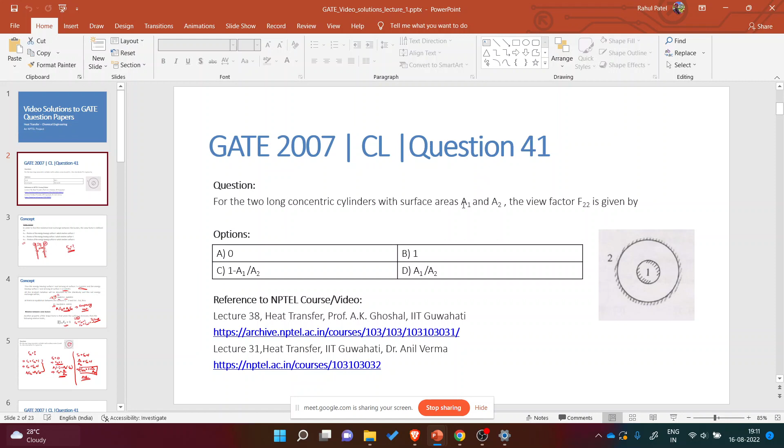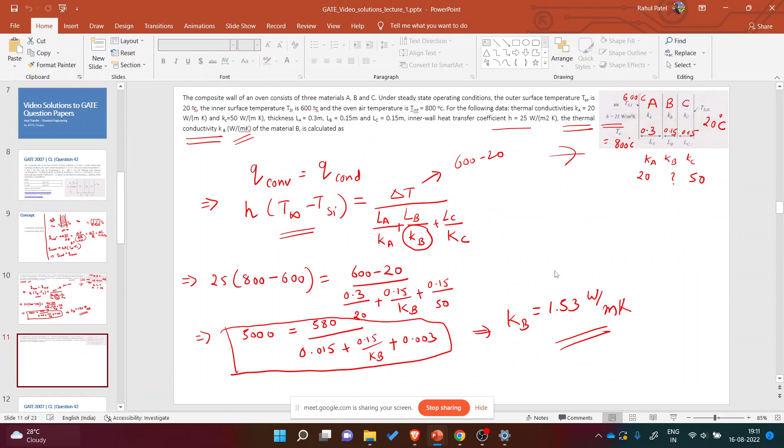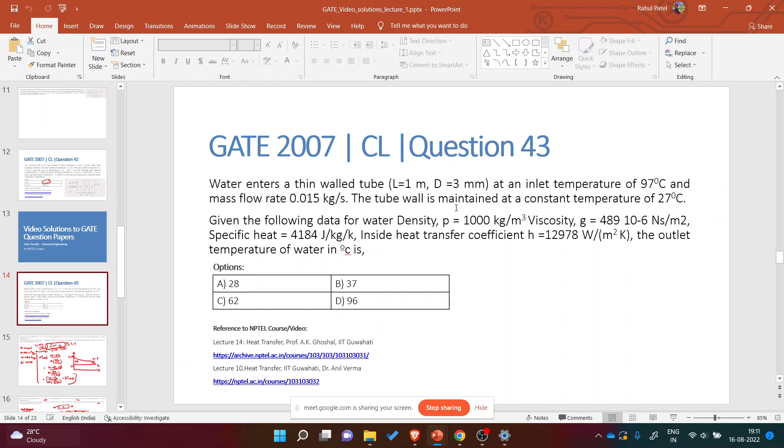So in the past class, we had looked at 4 questions. The first one was related to the radiation view factor. The other one was a heat balance equation across the wall. The third one was related to flow across a thin walled tube, which introduces the concept of log mean temperature difference. Then the last question was a heat balance across a stirred tank vessel. These were from GATE 2007, and today we will be looking at the GATE 2022 paper.

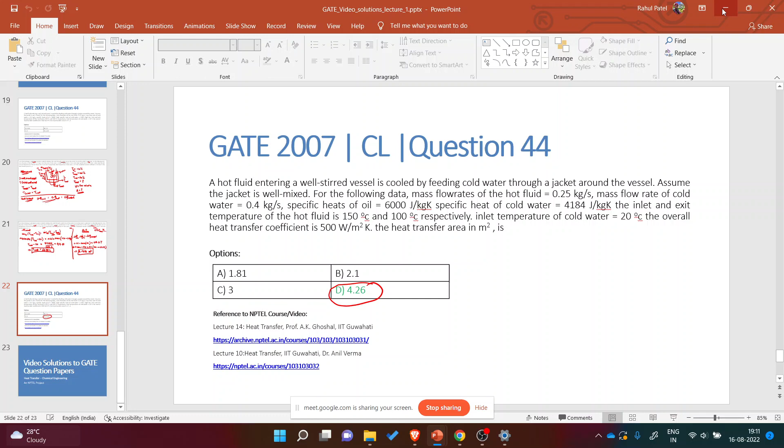Okay, so let's just start. I will read the first question we will be solving today from GATE 2022, chemical engineering paper, subject heat transfer.

We will try to solve all the questions on heat transfer within a couple of weeks, and then move on to other subjects. This is question number 30. You can find all these past year question papers on the GATE portal - not the NPTEL portal, but the specific GATE portal.

The first question we will be solving: a perfectly insulated double pipe heat exchanger is operating at steady state. Saturated steam enters the inner pipe at 100 degrees Celsius and leaves as saturated water. So from this part of the question, you can see that we have a double pipe heat exchanger.

Now saturated steam is entering from here. Let's call the temperature TH of steam. Here the steam changes into water - the steam condenses into water and the latent heat is used for heat exchange.

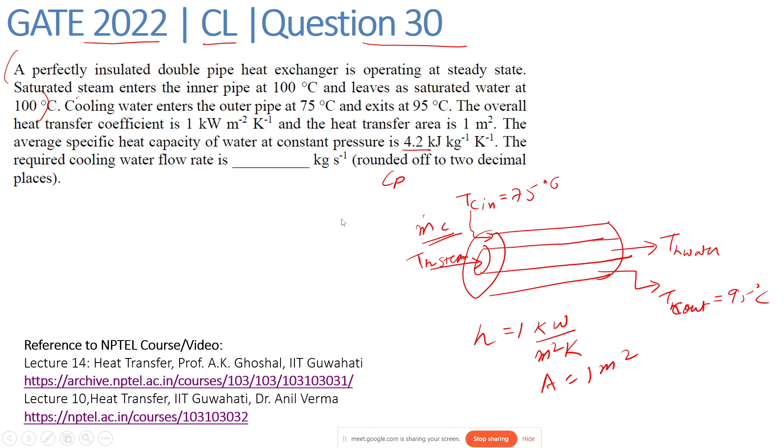One more thing - this was a numerical answer type question, so they had asked to round off to two decimal places. If you round up to two decimal places, then the answer range will be, I think, 0.14 to 0.15. So your answer should lie within this range, since this was a numerical answer type question.

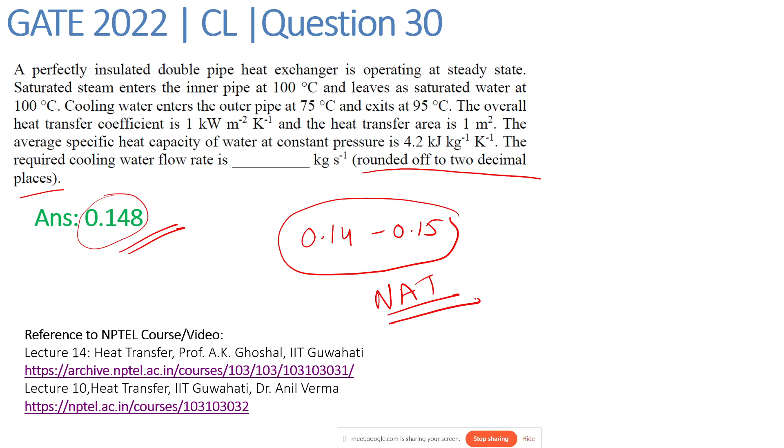Now let's look at another question. I'll just quickly read the question, and in the video you can see the details of that question again. Consider a bare long copper wire of 1 mm diameter.

Its surface temperature is Ts and ambient temperature is Ta, where Ts is greater than Ta. The wire is to be coated with a 2 mm thick insulation. The convective heat transfer coefficient is 20 watt per meter square per Kelvin. Assume that Ts and Ta remain unchanged. To reduce the heat loss from the wire, the maximum allowed thermal conductivity of the insulating material in watt per meter per Kelvin, rounded off to two decimal places, is...

Again, this is a numerical answer type question, and we have to answer to two decimal places. If in a heat transfer question you find anything related to this insulating material and heat loss, then it will be based on the topic of critical thickness of insulation, or critical radius of insulation, whatever you call it.

In this specific question, we are considering a cylindrical system - so this is my wire and this is my insulation. We have been asked to find the thermal conductivity of material such that it reduces the heat loss from the wire. This heat loss will be maximum at the critical radius of insulation Rc, and below that the heat loss will be minimum. So we have to find this K for which Rc satisfies this condition of critical radius of insulation.

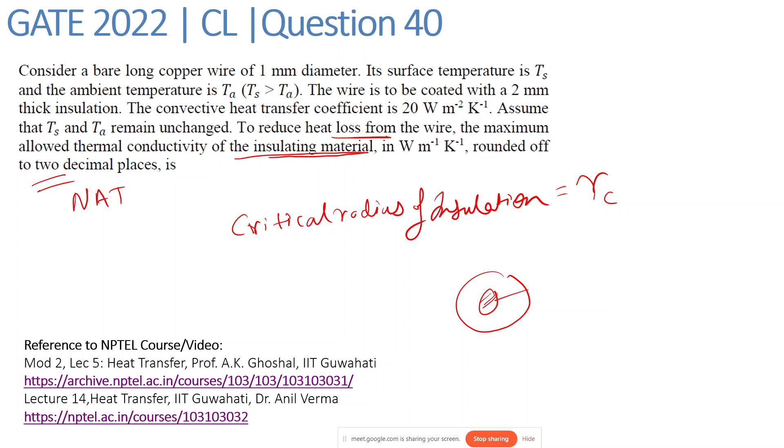Okay, so in this question, we discussed the concept of critical radius of insulation, and then we solved this question to find the thermal conductivity of the insulating material based on critical radius or thickness of insulation. If you have any doubts, you can just ask it.

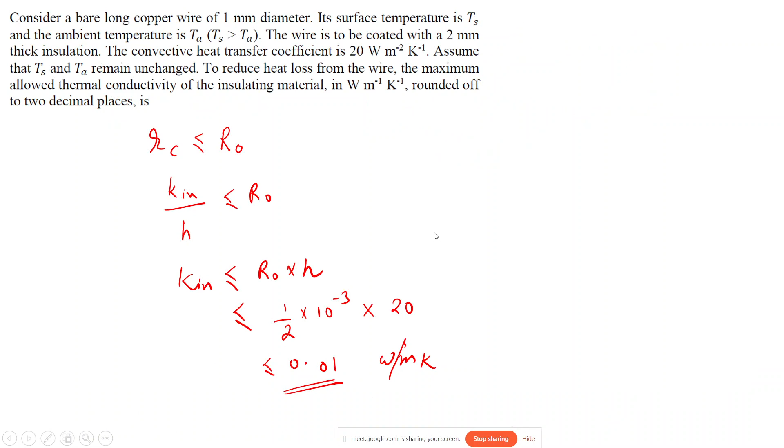Or else we can move to another question. So these are the basic formulas. You can see the derivation over here also. So basically, we'll be equating this. We differentiated that heat balance, this resistance heat balance equation, and equating that till zero, we will be getting the critical thickness of insulation as K by H.

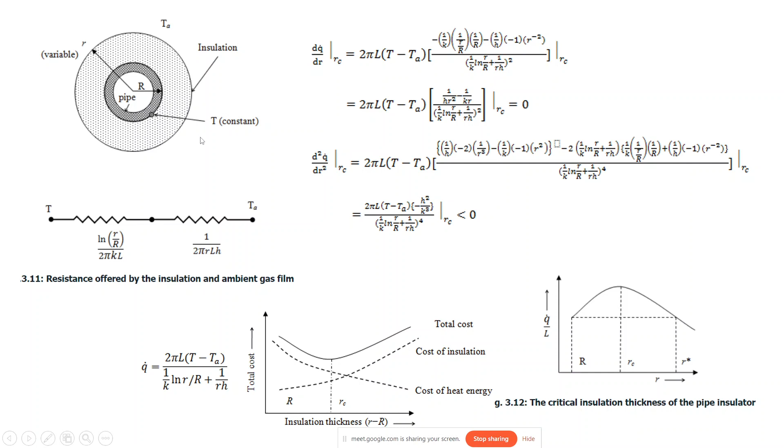So you don't need to derive all this. You can just straight away remember that formula, that for cylinder it is K insulation upon H. So just make sure you remember that K is for insulation, not the material. Many times to confuse, they will be also providing the thermal conductivity of the pipe. So you need to consider the thermal conductivity of insulation, and the H will be for my ambient air. The formula for critical thickness of insulation will be K by H for cylinder, and for sphere, similarly you can derive it, and it will be 2K by H.

Let's look at the third question. I'll just straight away play the video. So just to give an idea, I have provided the links of this question below, so you can just click and find those links.

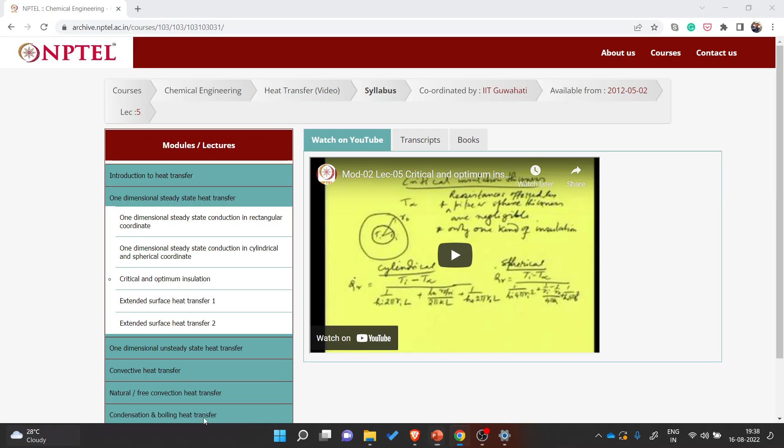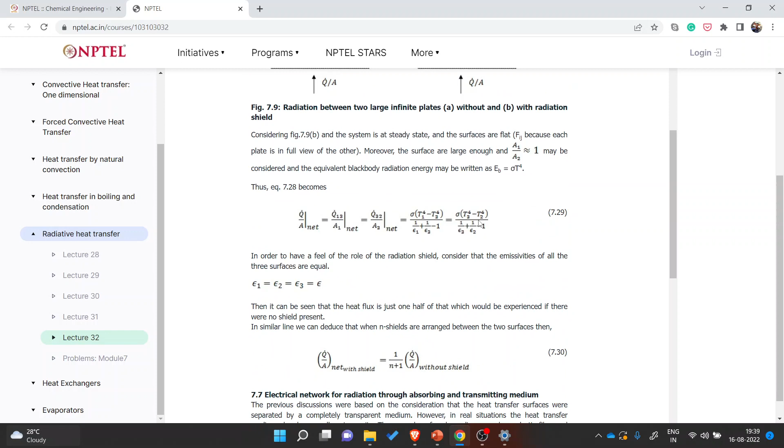Okay, so here you can see we are having lecture 32 of heat transfer. So if you just move to lecture 32, you will find the concept related to radiation shield. In this specific question, we will be using this concept to solve the question. Okay, so let's just play the third question.

Hello. We will be solving question number 41.

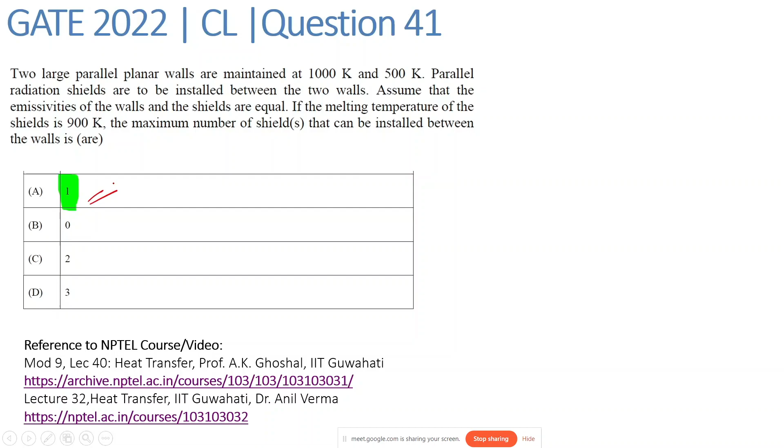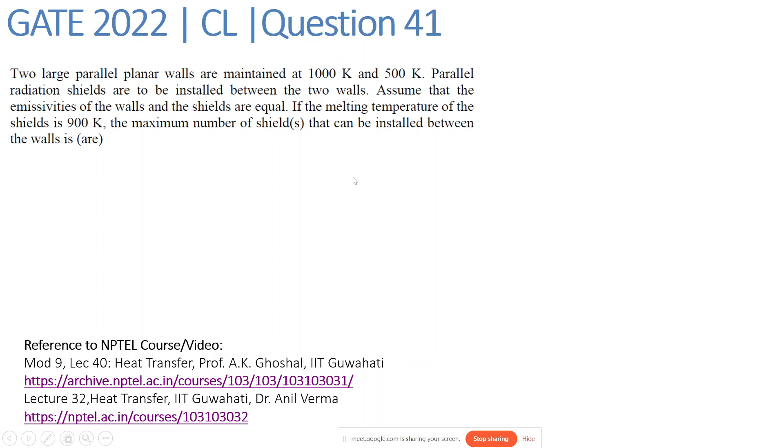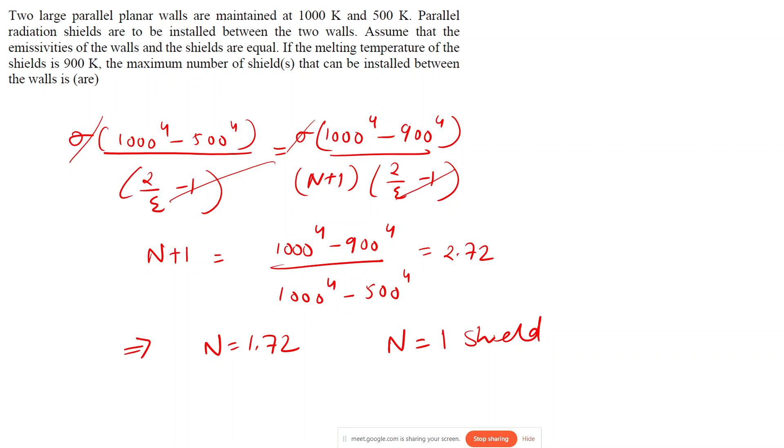So if you have any doubts, you can ask or write in the chat box. In this question, we discussed about the concept of the radiation shields. So do you have any doubts, anyone?

Okay, so we will move on to the last question for today's session. This is question number 54 from GATE 2022 paper, and it is related to the fin, that is basically the extended surface part of the heat transfer area.

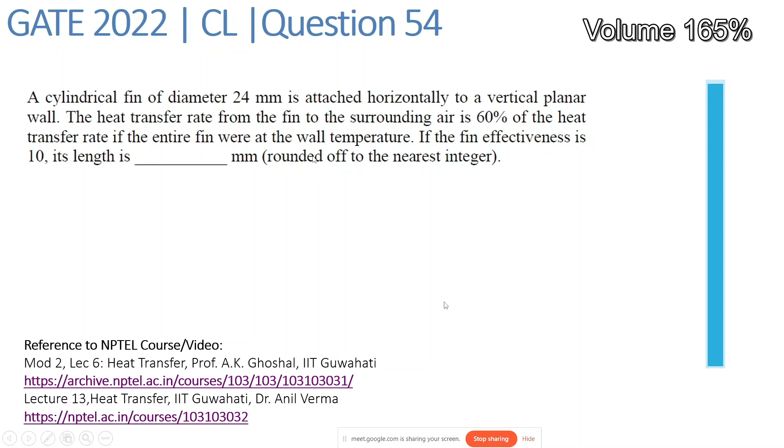Hello everyone. We'll be looking at question number 54 of the 2022 paper.